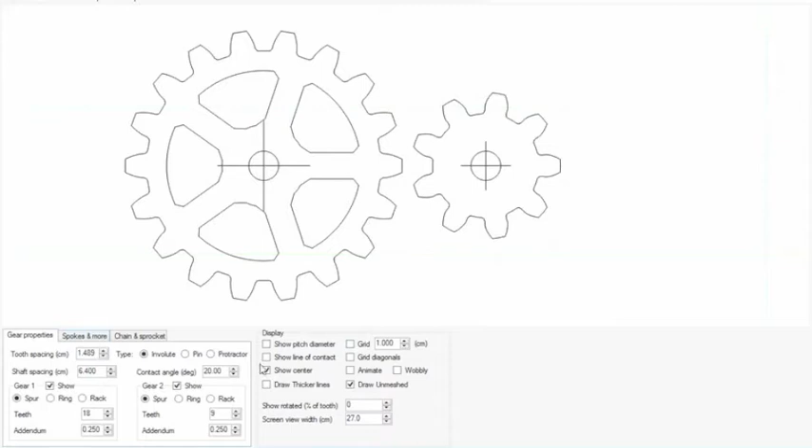And then for convenience, I'm going to rotate them to 0% of their rotation, and then I'm going to turn off the grid. I'm also going to turn off those little center crosses, and then the last thing I'm going to do is turn off spokes on this one gear, because with what I'm doing I don't want spokes. Now if I go up to export, I want to do the basic DXF, and then I can just save this.

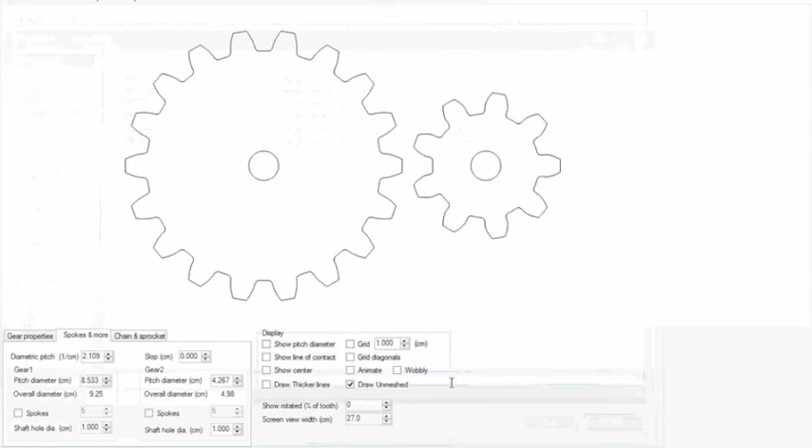And then I can go over to Autodesk Inventor, go up to open. I need to navigate to my file. There it is. And it brings up this DWG DXF file wizard, and it knows we've now got a DXF file. I can go to next. And what it'll pull up is this preview of what it's going to be opening. So I can see the majority of my file here. Now I know it's opening the right thing.

If I go to next again, the default here will be this detected units. And it'll usually detect inches off of Gear Generator. Well, as I said, I'm working completely in metric. So if I go back over here, I'm going to specify my units to be centimeters, because that's what I'm working in. And then I can click Finish. And now it'll open up this sketch, this 2D file of my gears.

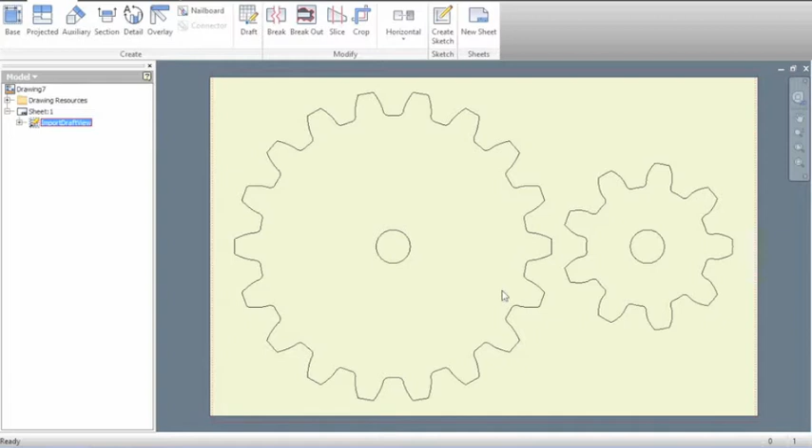So now that we've got our gears that we created into Autodesk Inventor, if we double click on them, we now are editing them as a 2D sketch. Well, as I run my mouse over this, you can see the way Gear Generator works is it doesn't actually export it as a single continuous vector, but as a whole bunch of little vectors. And we're going to run into a problem with that later, but I'll show you how to fix it too.

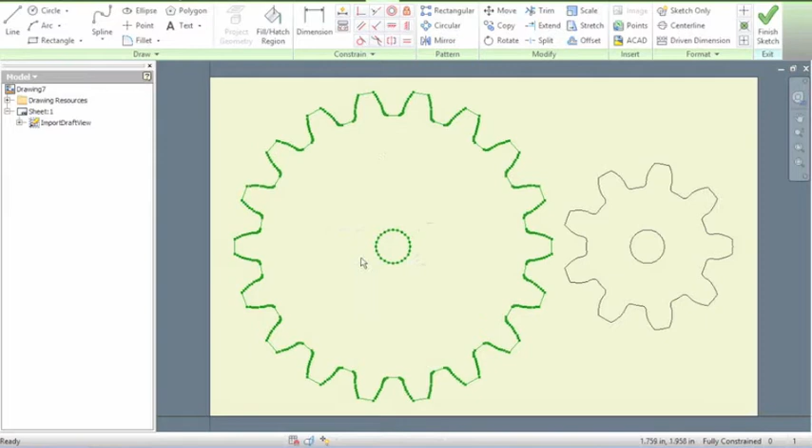So now what we do is we can highlight our entire gear, and there you can see even this center circle isn't actually a circle, it's a whole bunch of little arcs. Oops. And then I can go to copy. I have this whole gear copied, and I can create a new standard file, create a 2D sketch, and paste in my gear. Now I can see our gear showed up over here.

Well, I like to work with our gears, or anything really, when it's centered around the origin. So to do that, I'm going to go up to here, create a circle by tangent points, and then using all of these little arcs, I just select 3 of them, and it gives me now a circle where the center point is the center of my gear. So now if I go up to Move and select the entire thing, select my base point, and bring it down to here, it should just snap onto my origin, which is exactly what I wanted.

And now I've got my gear centered around my origin. Well, now I want the Tetrix pattern on the center of this so I can attach a motor hub to this gear, or really any other Tetrix part to the center of this gear.

I'll go up to Open, and what I've done is I've downloaded the entire 2012 kit of parts, and the kit doesn't change each year, so the same kit will work every year. But I now need to select all files so I can see all these PTC files, and I need a file now, any file that has the Tetrix hole pattern. Well, I know the flat bracket has that, so I know this is the Tetrix hole pattern because they made it.

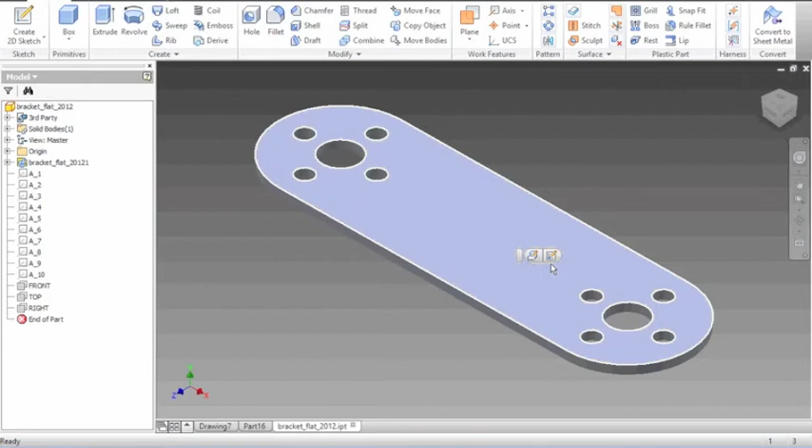So if I click on my surface and go Create Sketch, I can now select this hole pattern, copy, and paste it into my new gear. Well, same thing we had to do with the gear. I'd like this to be at the center of my gear so that it's actually useful.

So I can just take my stuff, highlight it, select my base point as the center of this pattern, and move it into the center of my gear. Now I can delete everything from the center except for what I want, which is my hole pattern. So I can get rid of all of those little arcs in that little circle I used to move the gear. And now we've got a gear.

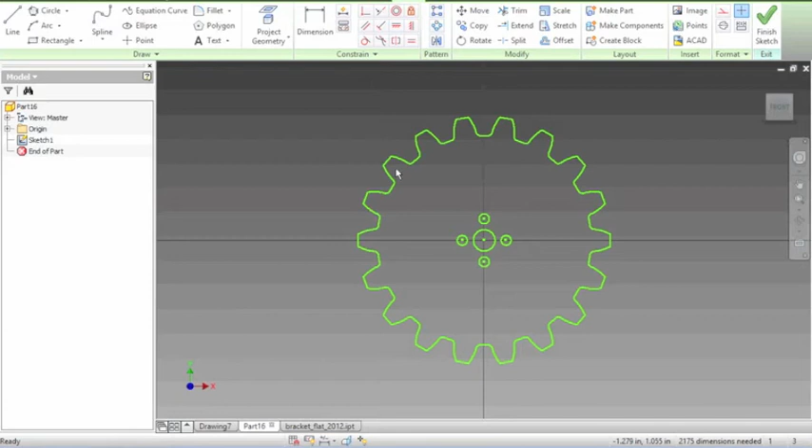Well, we're not quite done because of the way Gear Generator works and exports files, and these aren't one continuous vector. There are a whole bunch of little open loops or little gaps between all of these vectors. So what I'm going to do is right click and go to Sketch Doctor. Then I can click Diagnose Sketch, and we see all of these errors and all of this white stuff. That's all of those open loops that are going to prevent us from making this a 3D solid.

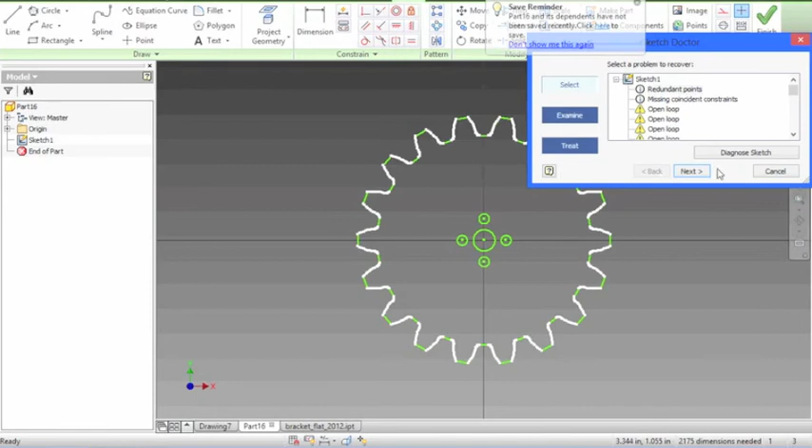So if I go through and have it help me fix all of these, I can just hold the Enter key and it fixes all of the points. It's basically fixing them all really fast because I'm clicking yes very fast by holding Enter. And eventually you'll get all the way around your gear with everything fixed. The bigger your gear is, the longer this is going to take, but it's pretty easy and does fix your problem.

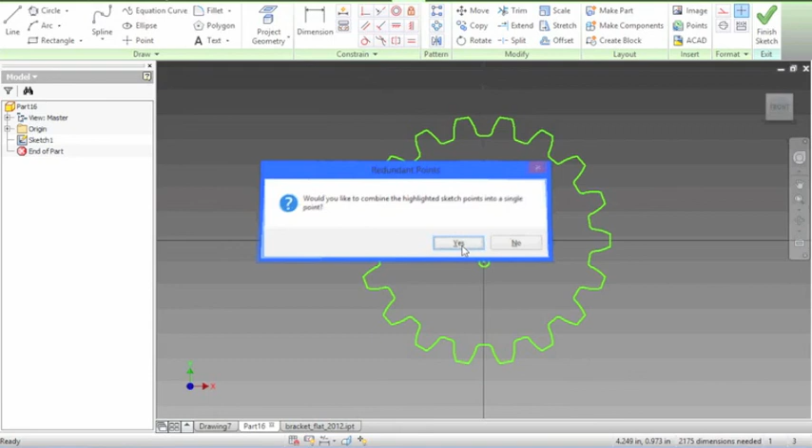So we should be getting close here. Maybe. This does take a while. So now I've fixed my gear, and to verify that I can go back to my Sketch Doctor, diagnose it one more time, and I should get this: all tests completed successfully with no problems.

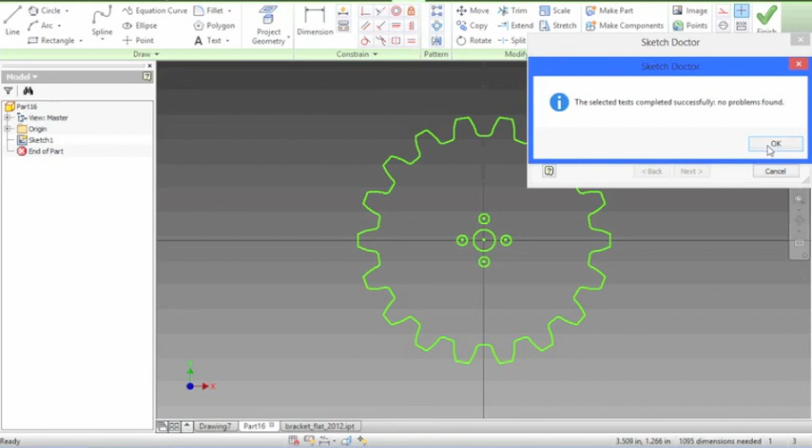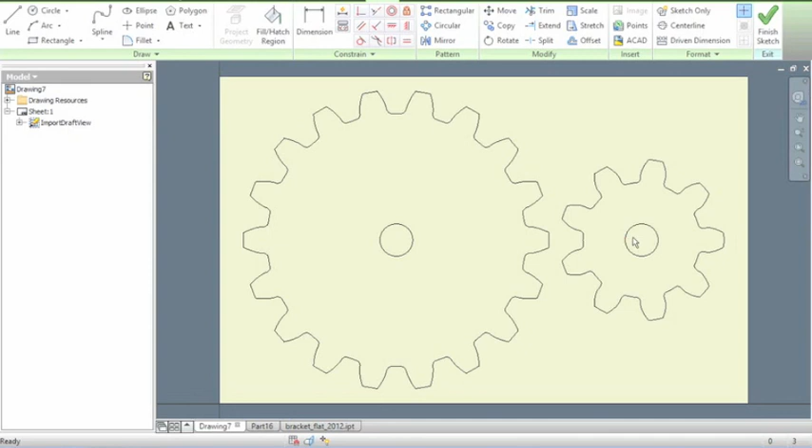Good. So now if I go to Finish Sketch, zoom out a little here, I can now extrude my gear to be whatever size I want, and we've got a 3D gear. And you do the same thing now with this other gear, and you can put the Tetrix pattern in it, or put a Lego axle hole in it, or whatever you want. But yeah, that's how you take a file from Gear Generator into Inventor and add a Tetrix hole pattern to it.